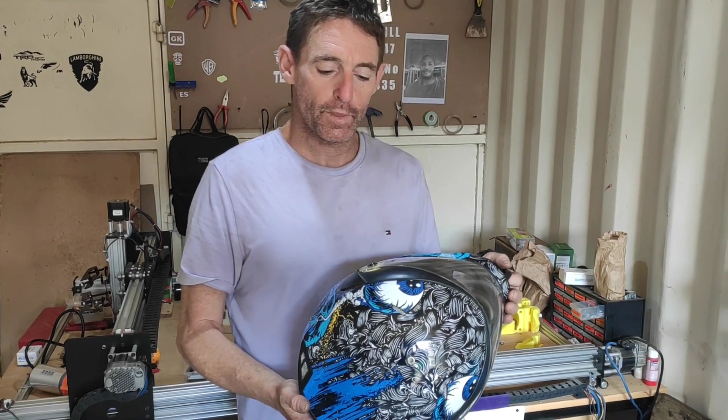I was unable to order it online, so I decided to find a place in Nairobi to get it made using 3D printing. There really is only one place, which turns out to be Ridorna.

What they did is I had them copy the plastic insert that allows the visor to move up and down, which is a difficult piece to make. There's some moving parts that allow it to stay in three different positions and allow it to stay up.

It would have been very difficult - I think I would have had to buy a new helmet if I couldn't have it made here. And it turned out perfect. I'm so happy that I was able to find this company.

I look forward to the next project that I get to have done here, because it was a great experience.

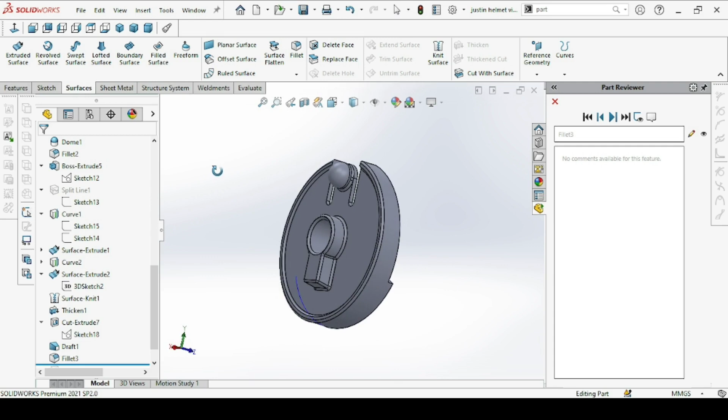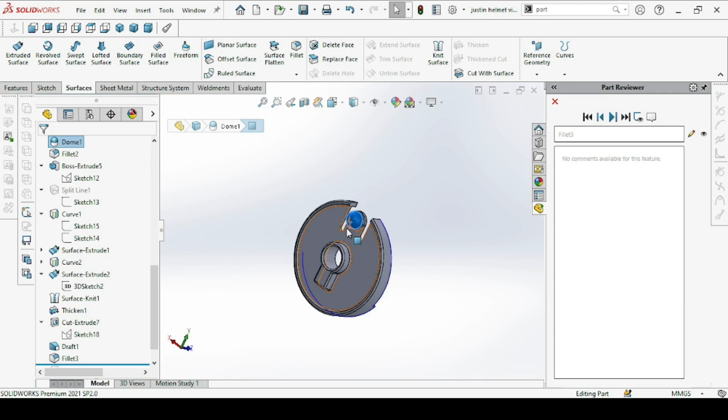This is how the model looks from the front. This is the part that actually interacts with the visor, and we have this domed part here that I've just highlighted. This part gets pressed with the visor, and then it springs back and forth into three distinct positions. That's why it has these two slots there to enable it to spring back and forth.

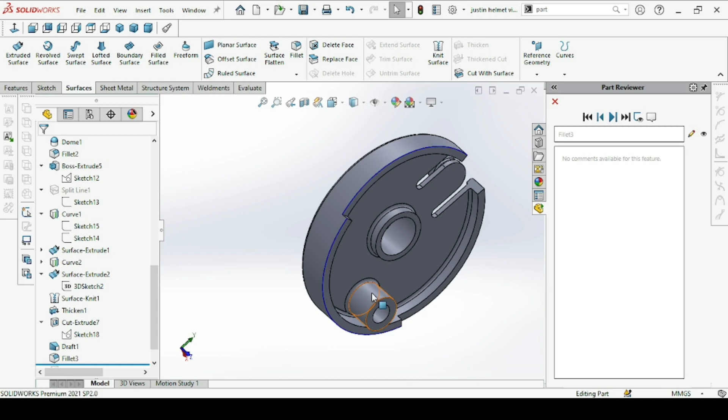Over here we have this locating feature. On the helmet itself we have a hole that this one mates with. So it's basically a foolproof mechanism to ensure that this part only fits in a certain orientation onto the helmet. Another tricky part that I'd say is the challenging part of this modeling was these two jagged faces.

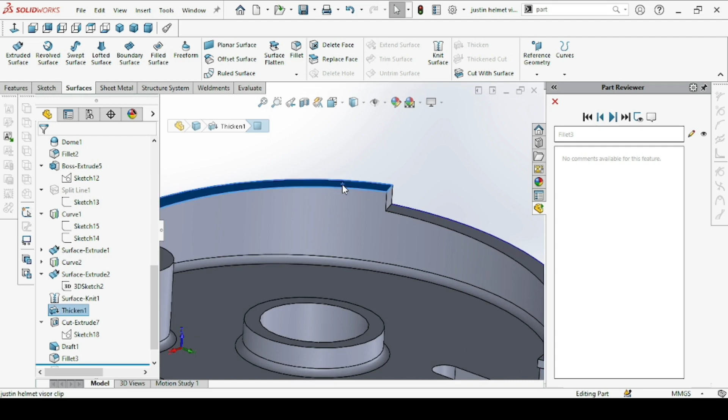As you can see, this jagged face right there, this face, it is cylindrical, but it's also cut in a slanted manner. And then there were two actually - there's this other face right there.

So let's jump to the beginning of how I started modeling. Let's jump back in time and see how I approached this.

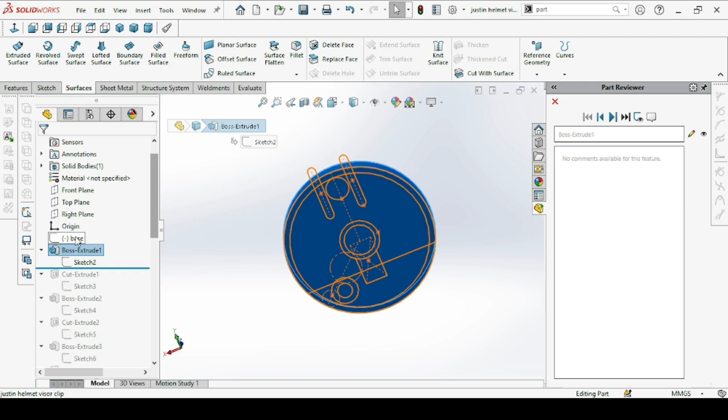The number one thing that I like to highlight is actually the sketch. So I first start with the sketch, and let me just hide this ornament right there. So this is the sketch that I started with.

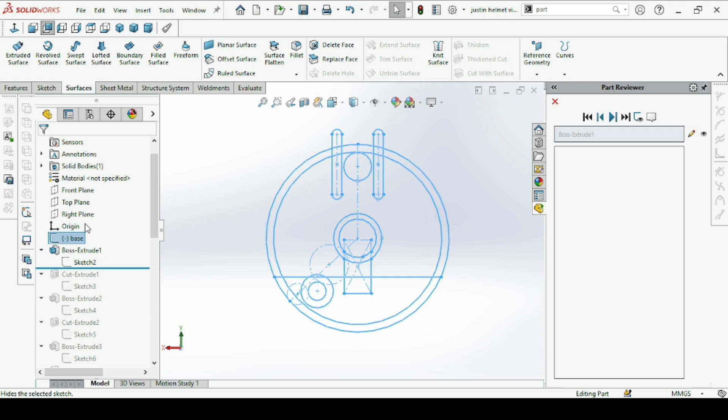This one captures most of the features that I've just talked about, and it captures them in dimensions. So this is the first sketch that I make, and from this sketch, that's where I get all the features from. After drawing that sketch, I start...

by extruding a small cylinder like so. After that, we cut through it, beginning to get the features that we desire.

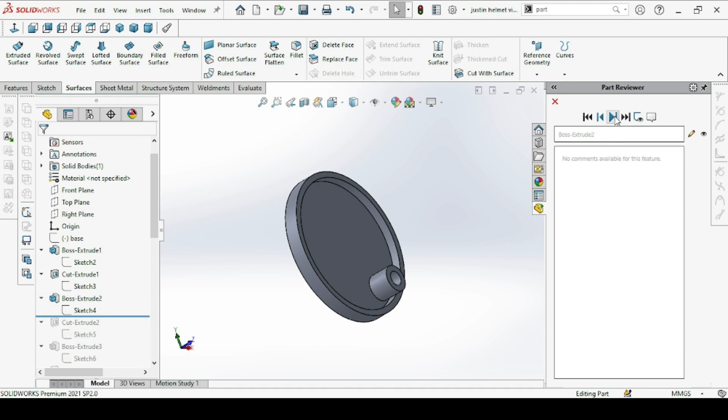The pin that I talked about was the other feature that followed, and then we have an extruded cut over there. We strengthen it with some ribs, and then we start the cut out of the feature that I talked about that interacts with the visor.

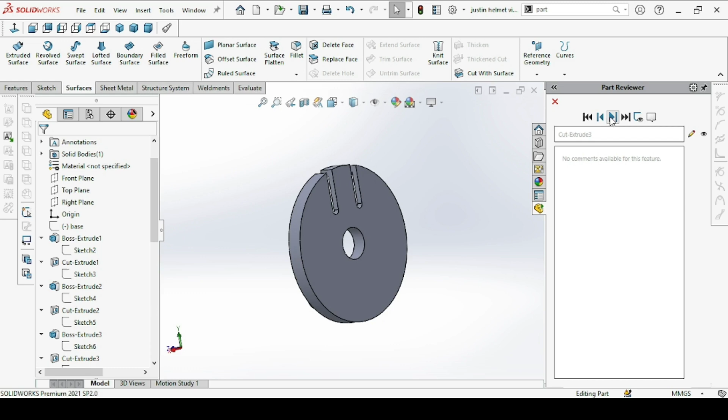So this feature, I made it in several stages. Let me just click through so that you can see how it was developed.

After that I cut that part, and then I started modeling that small cylinder and then put on the dome. Now you can see the part has begun to take some shape.

After that, it's a matter of filleting it to make it conform to the surface. And then again, I had a model that I was looking at as I was modeling this one.

I had a physical model of the mirror copy of the part that actually got broken, the left hand side. So after that we come up to that feature.

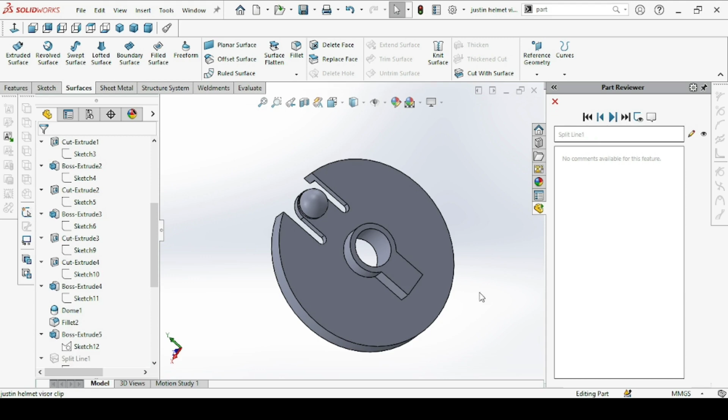It's just a simple extruded boss, and then after that now things start becoming interesting.

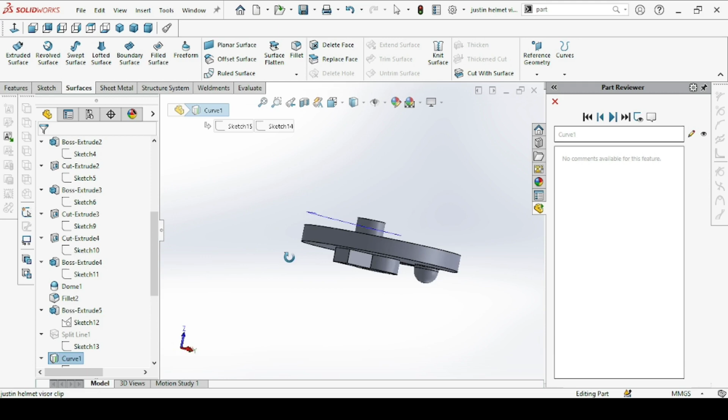Remember the two slanted walls that I talked about? First of all, I modeled a projected curve right there because it was a certain height on the two edges, so I had to capture it just right.

As you can see, it's slanted and at the same time it's concentric to the axis of this circle.

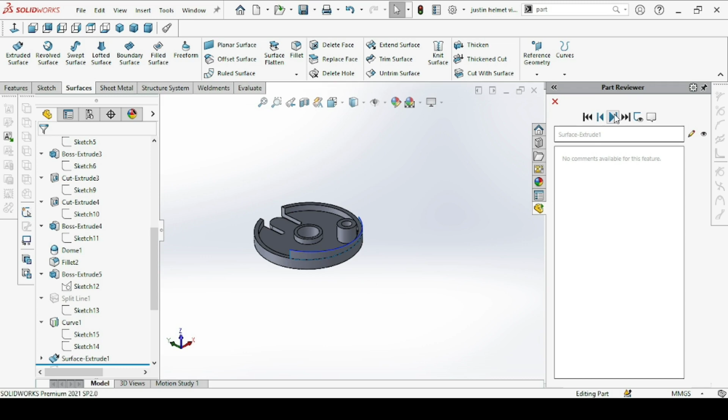After that, I extruded a surface, and then I did the same thing for the other face right there. It's a bit smaller, but I employed the same tactic.

After that, I thicken the two surfaces, and now as you can see, they have conformed and they're now one body with the rest of the design.

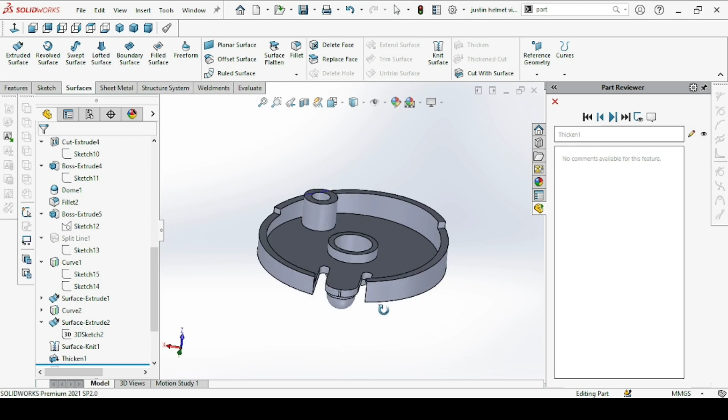From here on in, I was happy with the model. It's just capturing some few features and filleting it.

So you add a couple of fillets as you can see, and the model was ready. I was lucky this time, and it worked the first time.

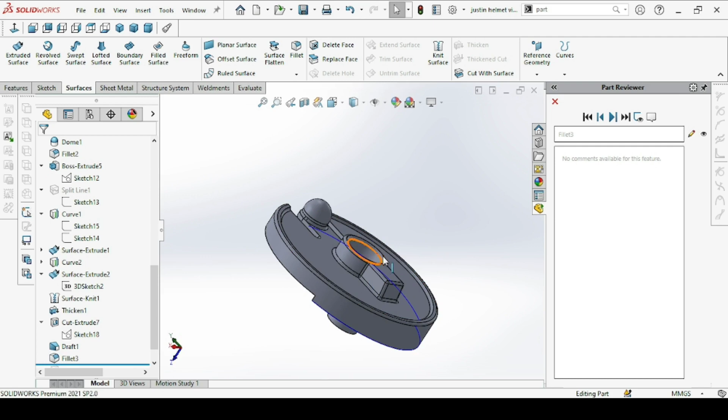This is the model that you can see, just in the yellow model that you can see on the helmet that Justin is holding, was the first model I actually printed from this design, and it worked perfectly.

I'd just like to say it was a very, I'd say, medium level sort of modeling, and these are things that we get from time and again.

Sometimes you have a device that is basically working okay, but you have some few parts that are missing or have broken because of use over time or abuse, and most of the time you might find that you're forced to throw out the whole thing because of just a small part.

So if you have such challenges, you can reach out, and we can see how we can help each other, because this is something that I do. I'm sure that I will welcome any challenge that is thrown my way.